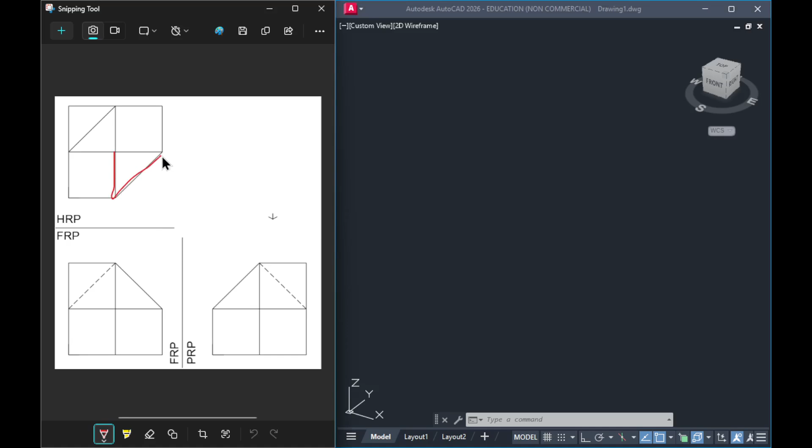Okay, let's just imagine the object first. What does it look like? This is a case wherein the FRP looks exactly the same as the PRP, which means there are symmetrical features. When we look at the image and try to imagine it, we can see that this plane actually appears in all three views.

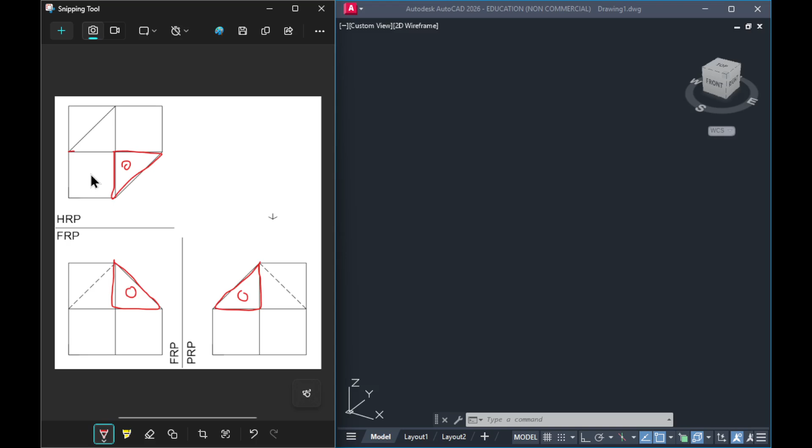So this is the same plane here, and it's also the same plane here. We can say this is our oblique plane. Then, looking at the right side and front views, you can also deduce that these two planes correspond to this plane and this plane.

So these two planes right here are inclined planes. Lastly, if you look at the backside plane here, it's actually symmetrical. This is another oblique, like a copy of the oblique on the other side. The only difference is that this area is hollow here, but on the other side there's a platform. This plane is just a normal plane, shown as an edge view here, and the same applies on the other side.

Hopefully that makes sense. I think that's the best or easiest imagination of this solid. There are probably other interpretations, but I think that's the easiest one we can come up with.

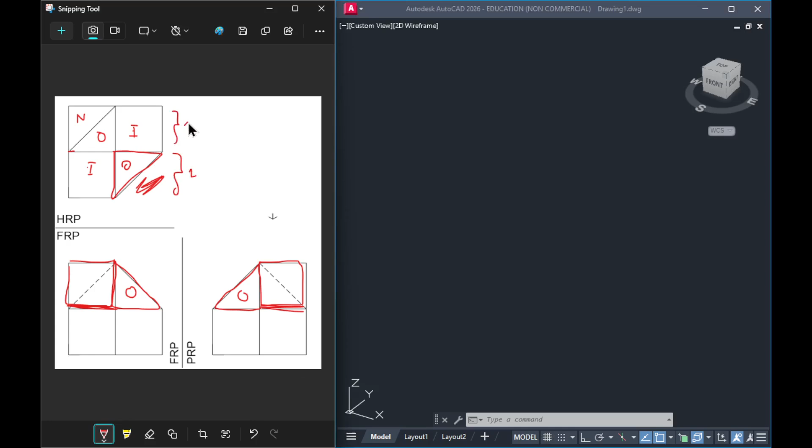So if you try to look at it, all points are just half distances, if you think about it. So what we can do is create the glass box as a 2 by 2 by 2 glass box. Think of it this way: this is one unit distance, and this is another unit distance, so 2 units in total. Same can be said for the width, 2 unit distance, and same for the height, 2 unit distance.

So let's start there. What we'll do is create a rectangle that is 2 by 2, like this. I always like to start with the model space slightly orbited, as opposed to just looking at it straight away from the top-down view.

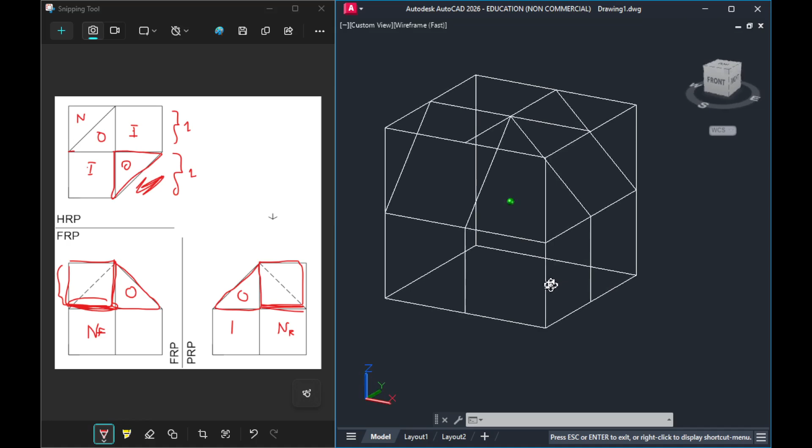Now, I'm looking at it. If I connect this line and this line, this point and this point, that will create the oblique. And if I connect this point and this point, that will create the incline. This one, this incline right here, that's an incline. This is the same incline, which is shown in this edge view here.

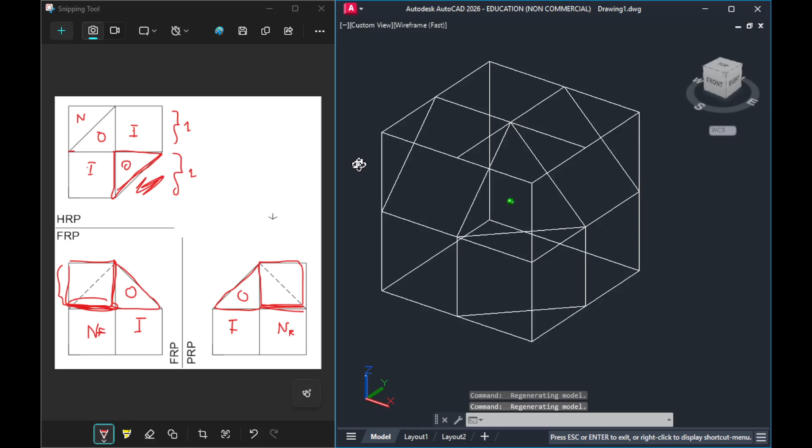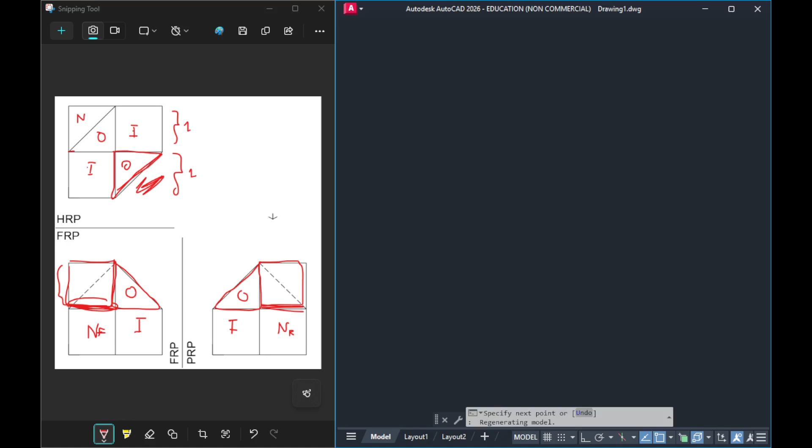So, gagawin natin is, bababa lang natin. But let's move it downwards by 1 unit, and connect it here. We'll do the same for this line. Move it vertical. Let's turn this on to make sure na vertical siya, and let's say 1 unit din. Then connect it here. Ganyan.

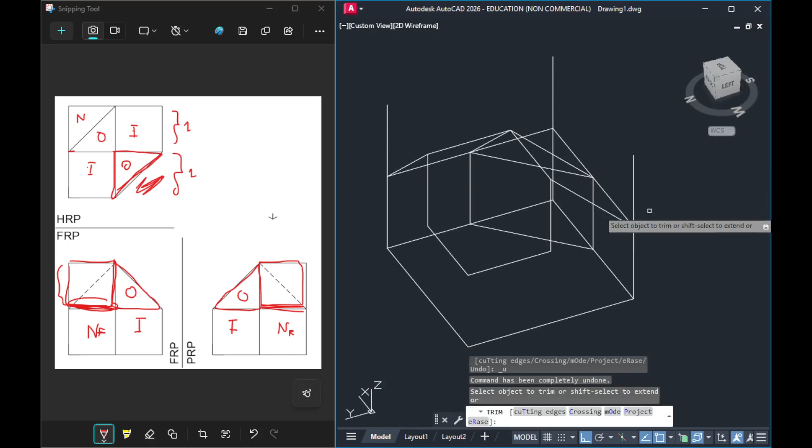Now, it may get a little bit confusing, so let me just delete these reference lines. Let's just delete this reference line right here. Trim muna natin, see if we can trim this as well. Instead of trimming, i-shorten ko lang siya. Can we trim this? Maybe, shorten lang din natin. And lastly, ito, trim ulit. No, shorten na lang. Punta dito. Actually, di-delete pala natin ito, no?

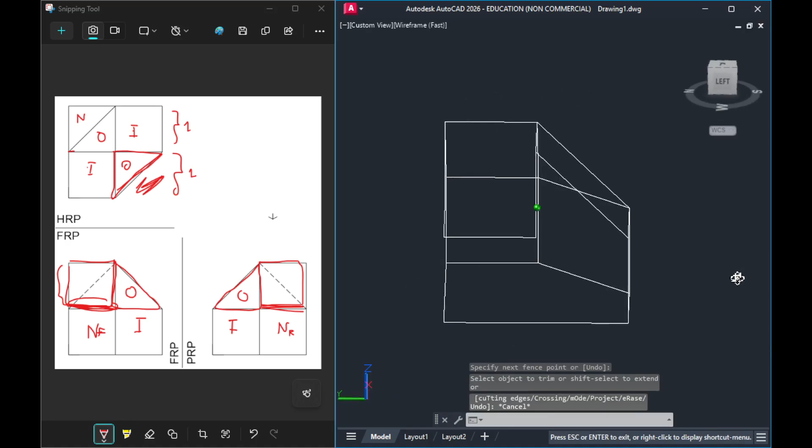We'll have to trim this pala. Trim. And also this one, trim natin. So pwede na ang gawin natin is, let's connect this line and this line, and we can probably turn ortho off.

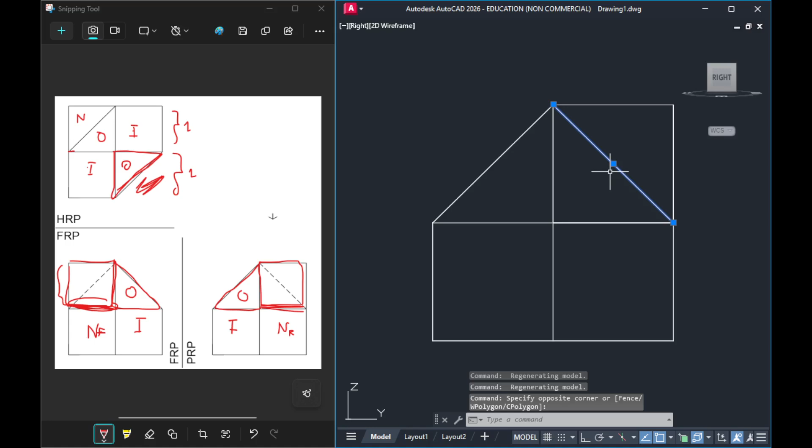And connect that one, so this will be our normal. If you look at the top view, tama yung view. If you look at the front view, it's this one. And itong line na to is a broken line kasi nasa likod yan. Again, it's still not being shown correctly because wireframe pa lang naman to. And sa right side view, ganoon din. Tama naman, except for this line, which is supposed to be a broken line. Okay, so ito siya.

And we need this line now to complete, so we have our wireframe. This is our wireframe. And from this wireframe, ang gagawin natin is we create surfaces now. So for the squares, gagawin natin easiest one to do, ito. The two easiest ways to create a surface is through either a region command or a loft command. The loft command is done by connecting two lines together, and it sweeps across that line, and whatever surface it produces creates a planar surface.

So gagawin natin is, and the other one is region. The region is if you have a closed loop or polyline, then if you do the region command, it automatically creates a surface using the profile of that closed polyline. So I think for the rectangles, or itong mga quadrangles na to, pwede natin createan siya ng closed polyline using REC.

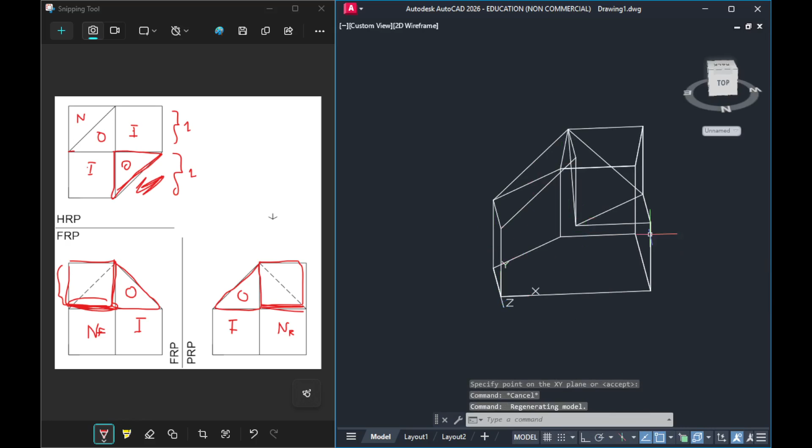UCS again, this is my origin. My X direction is here, Y direction is here, so ito na yung plane ko. So I'll do polyline again, ito, and C to close. Yan, this is now my polyline. Okay, so let me just change the visual style para mas ma-imagine nyo. I'll do shades of gray para mas makita siya.

Now I've created, saan yun, so this one, did I create a polyline for this? Hindi pala na-create yung rectangle dito, sige, mamaya i-create ko na lang. Pero let's start with this one, polyline. It's now polyline. So if I do a region command, REG for region, and select this polyline, press enter, so it creates a surface. So this is a region, this becomes a region, and the region is considered a surface.

What's next is let's also create another region using this one.

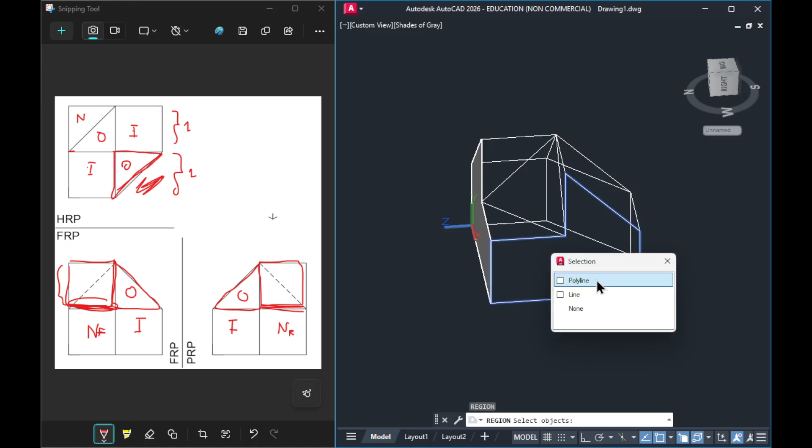Select the polyline. If these selection options don't appear, this is called selection cycling. You just press this button, or use the shortcut Control W to toggle it.

Do region, select, hover - selection cycling is quite important, especially when you have overlapping objects, like here where the polyline and lines overlap. So press space or enter, then you get this.

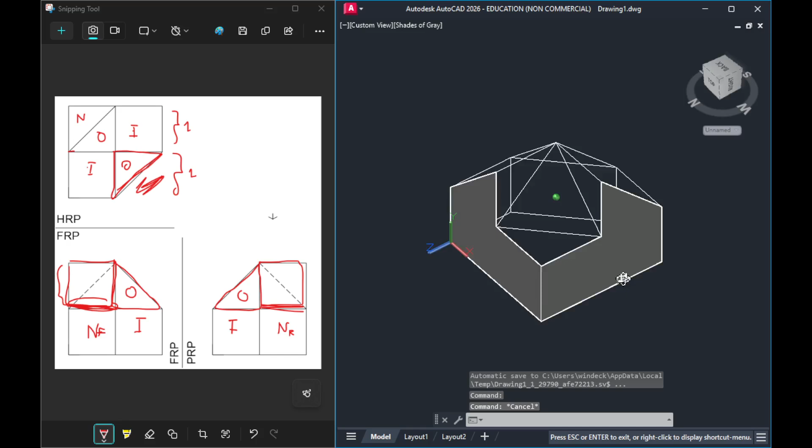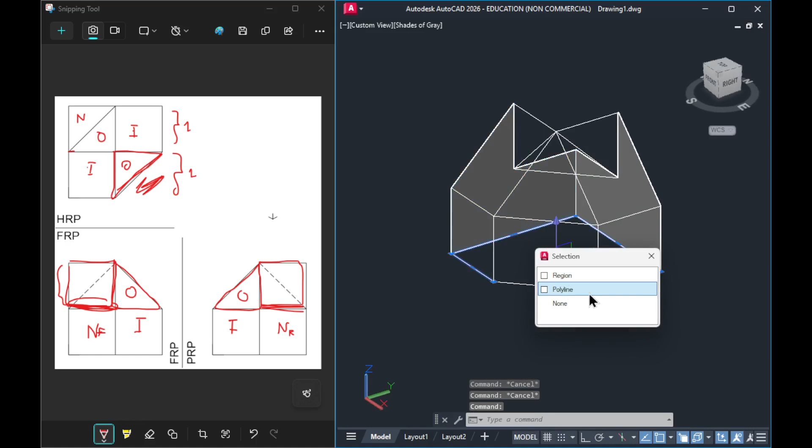Now I'll go back to world coordinate system. I'll do dynamic UCS because I think I didn't create the region earlier correctly - it created in world coordinate instead. That's why that polyline was wrong, let me just delete that polyline.

What we'll do is set up UCS again - this is my origin, X axis here, Y axis here, so I can create a region. Draw a rectangle here, or rather a polyline - this now becomes a polyline. So now I can create a region from the polyline, and it becomes a surface.

Again, let's do UCS once more - this is my center or origin, x-axis, y-axis. So now the vertical plane becomes my xy plane. Okay, let's do region again.

Select region, select the polyline. Wait, did I create it properly? Okay, region, and let's select the polyline. So it's slowly starting to take shape now.

For this one, I could do UCS again - X, then Y, then create a rectangle for the region. Or another way to do it, let me switch back to wireframe so you can see it in action - you can actually use the loft command.

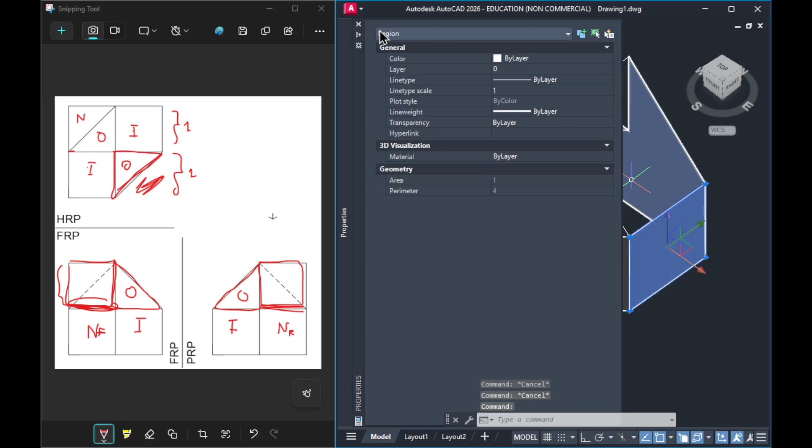But it has a different name. If you press Control 1 for properties, the type is a surface created through the loft command, whereas this other one is just called a region. Although they have different names, they behave the same - they're still considered surfaces. So when we eventually create a solid, they'll behave the same whether created through loft or region command.

So maybe I'll just use loft here. For triangles, loft is usually best because you can just select two sides of the triangle - this one and this one, or this one and this one. If there's a line here, it will still create the triangle.

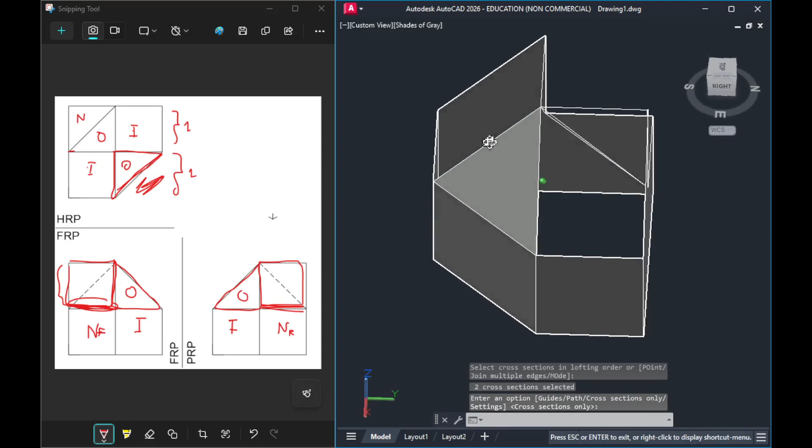Okay, let's do the simpler one - this one and this one. Press enter, cross sections only. Then let's do the command again - I can just press space to retrieve the same command.

So, line - is there a line here? Yes there's a line, so press enter. In a way, loft is faster since you already have the existing lines we created through the wireframe model, so you could actually use loft all the way.

Oh that was wrong. So, loft - this line and this line. Next I'll do loft from this line to this line. Let's repeat - loft from this line.

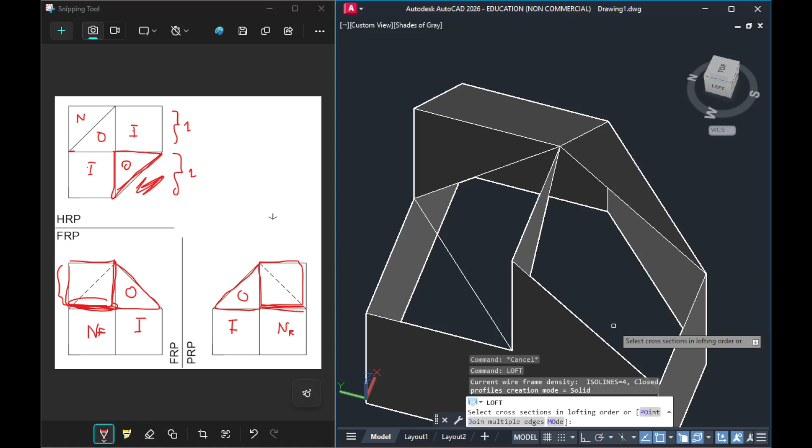That's why selection cycling is quite important here - once you create more and more objects, the objects start overlapping, so selection cycling becomes extremely helpful. So that's the line.

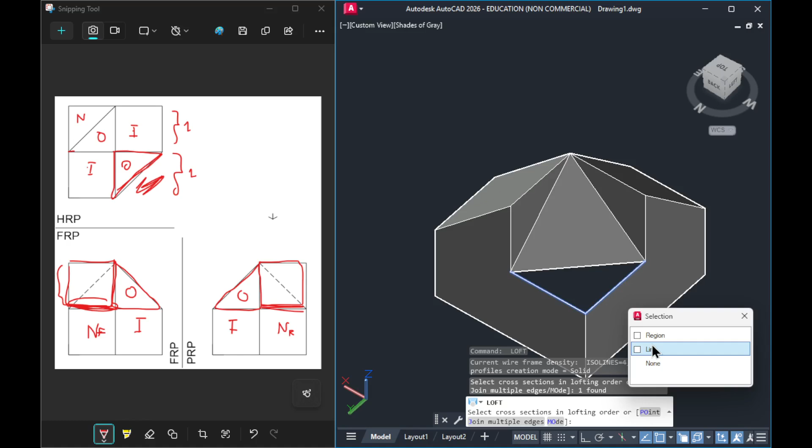Last is - what else? Just two more. This and this. And lastly, this line. Again, the line, at the center.

There's still one missing at the bottom. So we can create a polyline here - back to world coordinate. We can do a polyline from this point, close it, this one, and press C to close. That's our polyline. Let's select the polyline, and we can do a region of the polyline, and it will close it up.

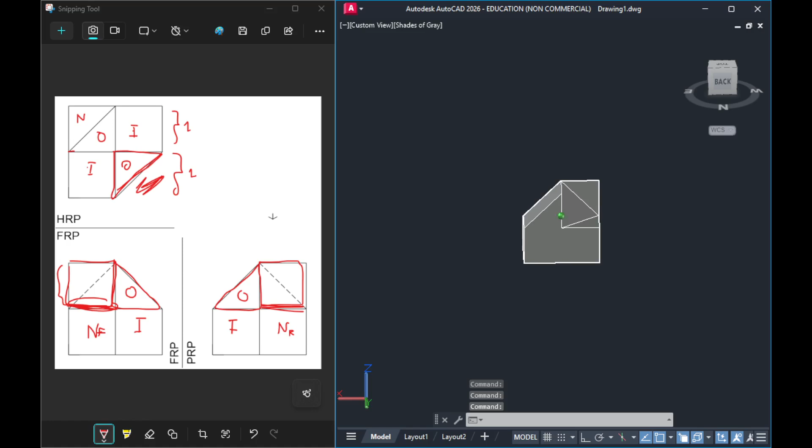If we did it correctly, this should be a watertight container - this bunch of surfaces now forms a watertight container. Because it's watertight, if we run the command surfsculpt, then select all the surfaces and press enter, it becomes one single solid.

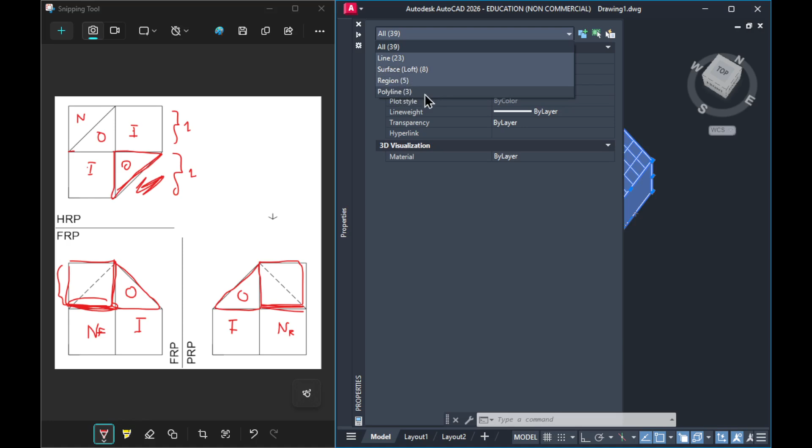If I press Control 1 for properties, you can see it's now a solid, as opposed to before being a bunch of surfaces. Let me undo that - Control Z so it's surfaces again. If I select everything, Control 1 shows there are 23 lines, 8 surfaces through the loft command, 5 regions, and three polylines. Now if I run the command again, the command is surfsculpt.

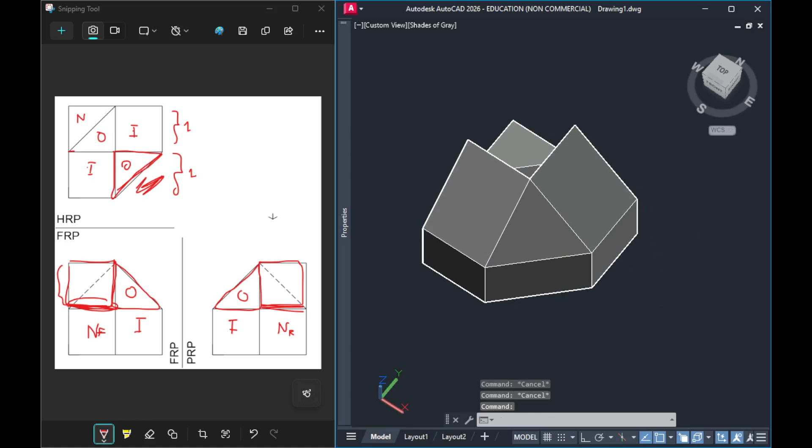Select everything, press enter. Now this becomes a single solid. So now that we have this solid, I'll teach you how to create an auxiliary view. Again, our goal is to show the true size of this oblique plane.

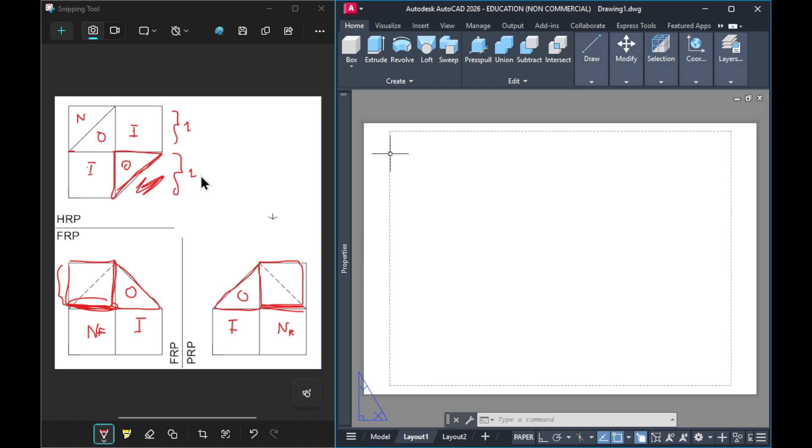So let's go to the layout tab. Just delete this first. I'm assuming everyone already has the Inventor interoperability plugin installed.

Let's go to layout and create a base view. It will load a bit, no? If this is the first time you're using the view base command, your AutoCAD might lag a little. Just wait it out, then here's the preview of the object.

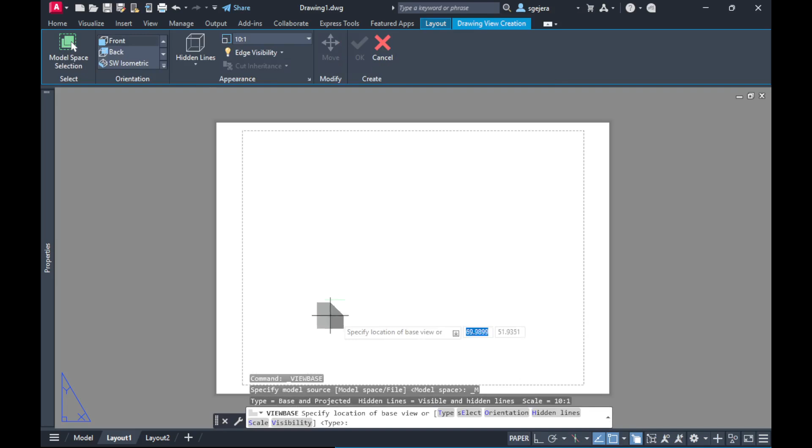10:1 is too small for my liking. Let me make it bigger. I can do 30:1, this looks okay. But actually, maybe I'll use 20 instead since I'll be rotating this in space for the auxiliary view.

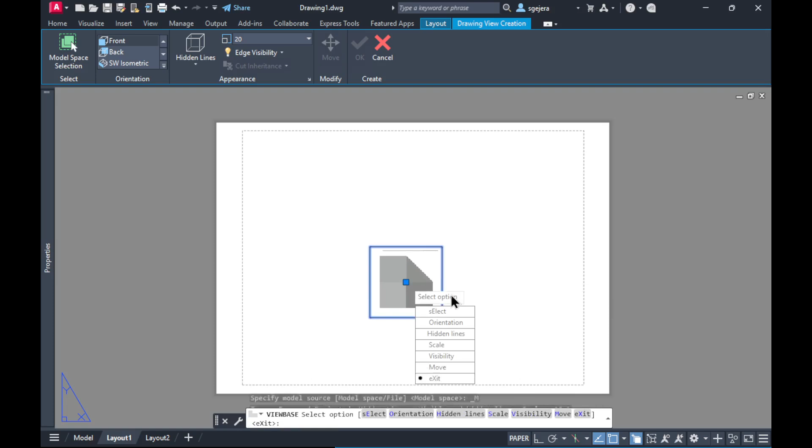Let's do this first. I'll just place it in the middle. That's my parent view, the front view. And before I do that, sorry, we should change this to third angle.

Always, before you do anything, especially when involving the view base command, always convert to third angle projection first, because third angle projection is the projection we use in ES1. Okay, so again, view base.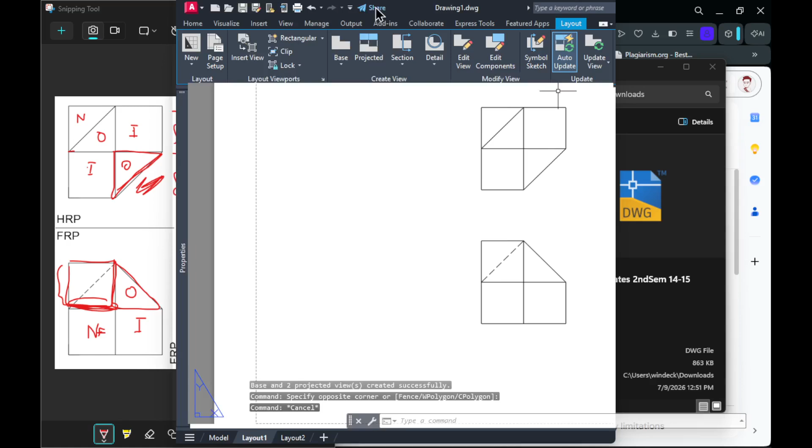This is our multi-view projection, so let's double check. That's correct, right? Let me delete all the markings here. Let's control-C. This should be deleted. So if you look at the original, this is one way you can check if what you did is correct.

Is to just compare the given with the 3D model you created and check the view base. If they're the same, it means the model you created is correct, or at least it's one of the possible solutions for that particular multi-view projection.

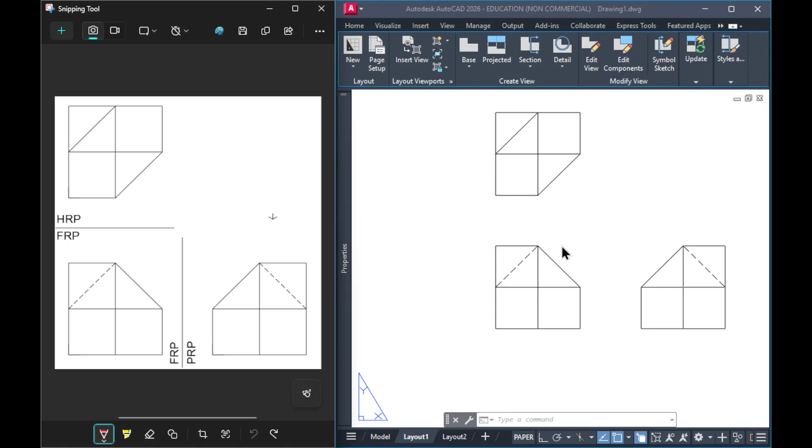Okay, so here it is. Now what we'll do is find the oblique plane. Now, what I showed you in the video before, let me make this more compact.

What I showed in the video I sent you uses a deprecated command, a combination of SOLVIEW and SOLDRAW, which isn't really used much in AutoCAD anymore. The only time you should be using SOLVIEW and SOLDRAW is if you have a MacBook, because MacBooks don't have the inventor plugin, so they can't use view base. So the only workaround is to use the deprecated feature, SOLVIEW and SOLDRAW.

But if you're using a device that already has view base, we can actually use a workaround instead. So again, if you look at create views, even the projected ones here, this only creates what are basically orthographic views.

So either if you move to the left or right, that will create perpendicular reference planes, which are the primary reference planes. It can be front, right, top, bottom, and left side, and you can also create the back side.

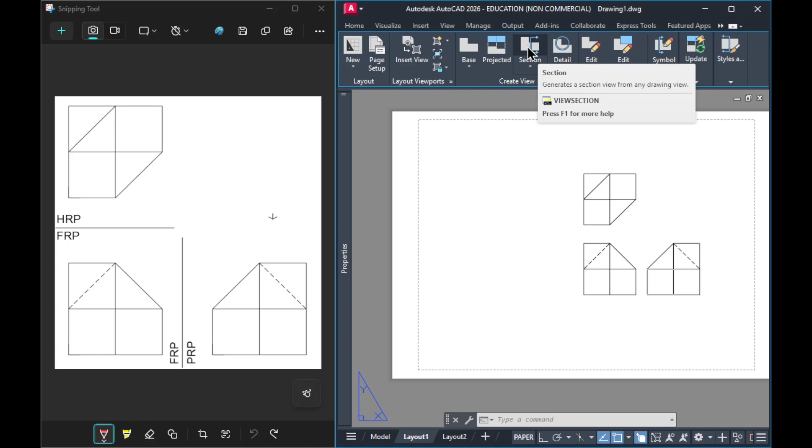But let's just do a random section view here. Let's move it here. Ang mangyayari is it shows a sectional view of the object as the view cuts across it. Now see what happens if I move the section view such that it doesn't cut the object anymore—the hatch lines disappear, because this view, or this sectioning plane, does not cut the object.

So we can use this section view right now as a sort of our auxiliary reference plane. If we try to angle this—not sure if we can angle this—if we angle it, it actually angles the view as well. So that's its auxiliary rotation. We'll use that to our advantage. It's like the sectional view becomes a pseudo auxiliary view in that manner.

So how do we get the ARP1 and ARP2 for this particular case? The way it works is, when we do an auxiliary view, if we want the true size, we first need to edge-view the plane.

Now the plane in question is this one. We can start at any view, but if we want to start from the front view, let's say this is our starting point. Then we need to point-view one true length line here. What is a true length here? If you look at this one, it's this line right here. This particular line is the true length line because it's parallel to this reference plane, or this line is parallel to this one, which makes it a true length.

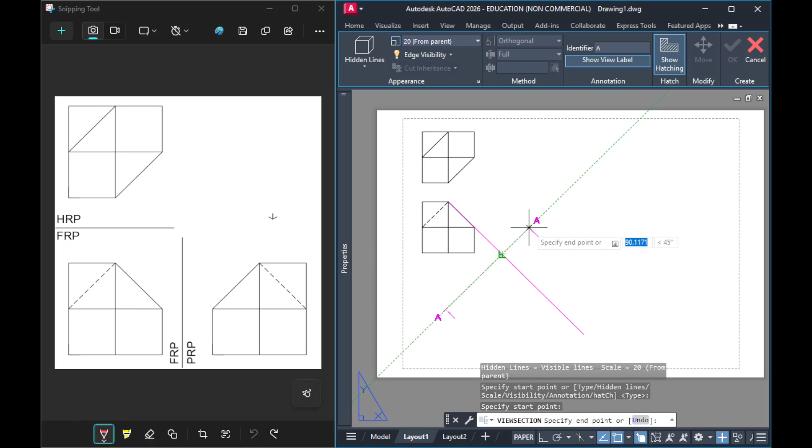So it's basically just creating an auxiliary reference plane, and I'll move it downwards. Center. And now, this is my first auxiliary view.

What I can do is I can even create a line here, and now I can delete this one, since we're just deleting the markings. And let's add a text. This is FRP, no? FRP sa taas, ARP1 sa baba.

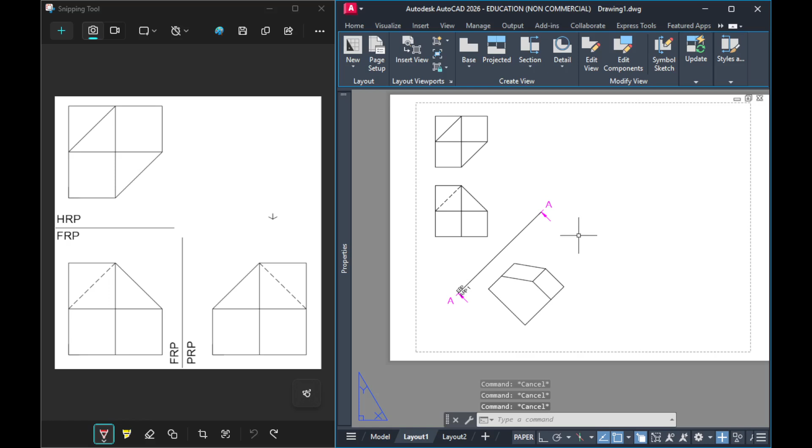We can even do something like this, no? And if you want, we can delete. Pwede pa natin i-delete tong identifier. Sige, wag muna natin i-ano na, mamaya natin problemahin yan. Pero, this is now ARP1.

Okay, so now that we have ARP1, I should probably move this somewhere dito. And the good thing about moving this one, it follows the rules for projection, no? You can't accidentally move it in other directions. So ang pwede lang natin ma-project siya is along perpendicular to the projection lines, which is this one.

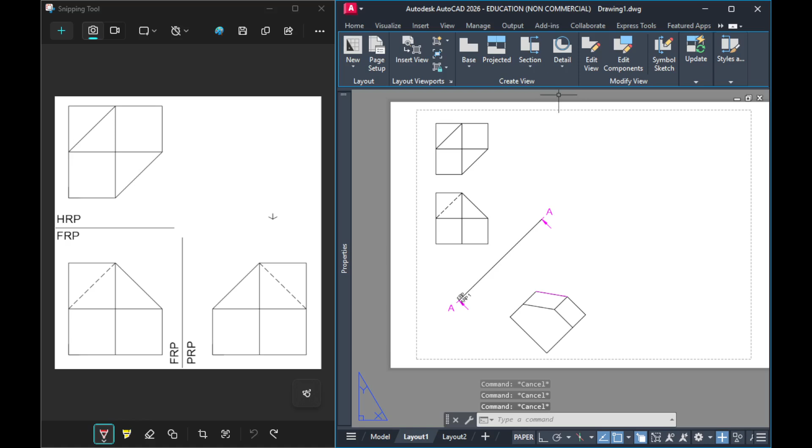So move lang natin siya konti dito kasi we have to create a parallel reference plane. Okay, so again same as before, gawa lang muna tayo ng isang reference plane. And again, ang purpose lang nitong reference plane na to ay para may basis tayo sa paggawa ng ating sectional view. Kasi hindi kasi considered as 2D lines itong lines na created by the view base, kaya hindi gumagana yung object snapping. Okay, so let's create a section view again from this parent view.

Let's gawa tayo naman somewhere dito, siguro make it parallel to this line. Like so. Oh sorry, bakit ko kinancel? I'll do it again. From this section, create a parallel line, like so, and I'll just project it somewhere dito. And I'll just delete this. Medyo malayo to, or okay na siguro. So I'll just make this a little shorter now.

So eto siya, this is now my auxiliary reference view. Tapos, sorry, nagalaw ko yata yung ano. Tama naman. And let's just mark the ano din, let's change this. I'll just mark point B to point B, and let's just...

Also add a text. Let's call this ARP2 naman, ARP1 sa baba. You can always make it a little bit nicer if you really want to. Dalawa lang natin ito, and notice how if you change it, nagbabago din yung sectional view.

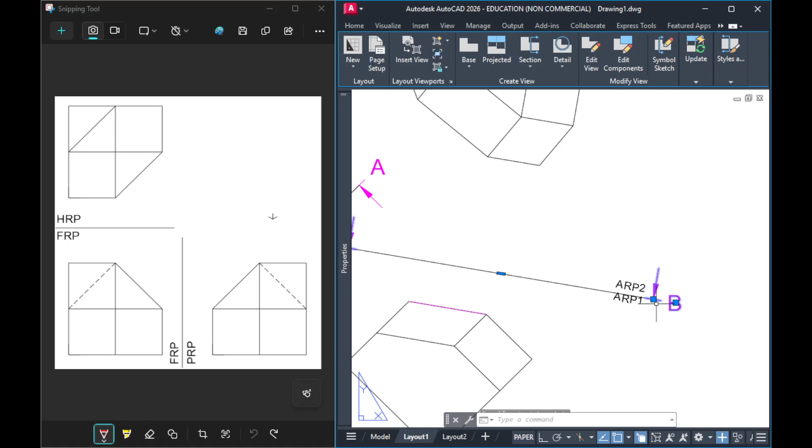Okay, and essentially we have created the ARP2, which shows our plane in its true size. Okay, let's just mark it true size.

Like so. Okay, and because ARPs or auxiliary reference planes are considered as parang additional views, then dapat we should—let me just remove this reference line na ginawa natin—because they are considered as reference planes, then dapat litaw pa rin yung hidden lines, no?

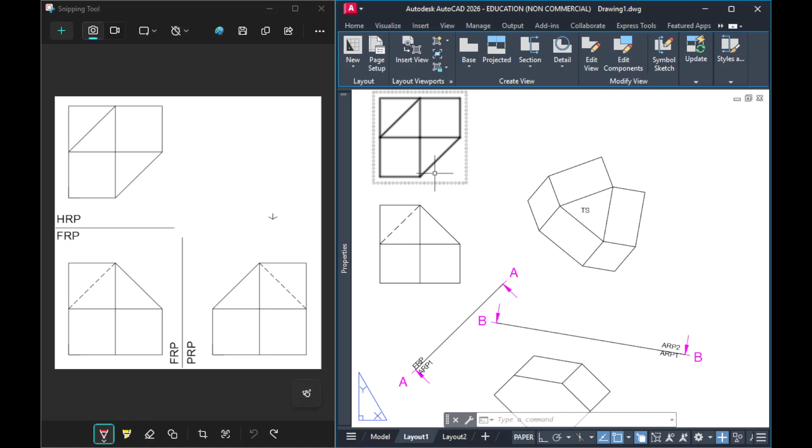So let's just double click this one, click on hidden lines, and instead of just visible lines, we also show the hidden lines. So visible and hidden yung pipiliin natin. Okay, so press X, escape to exit para kita yung visible lines.

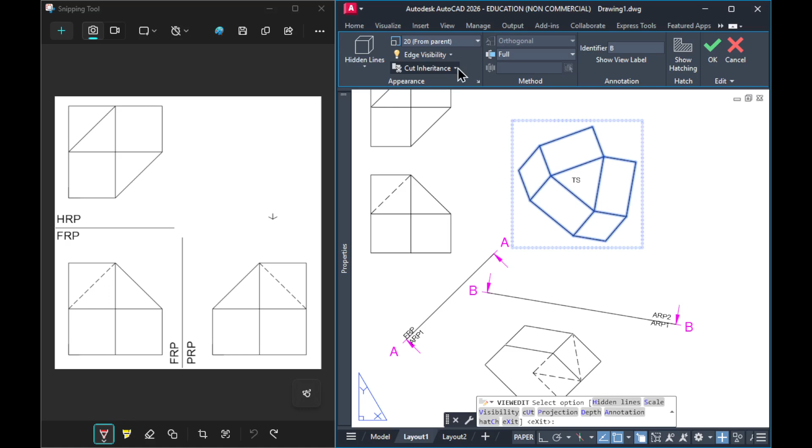This one as well, double click. Pwede naman double click, or you can also use edit view here. Then from edit view, not edge visibility, hidden lines here. Pwedeng i-change nyo from visible lines to visible and hidden lines. Press enter, and now you can see the final answer.

So that's how you use sectional views. And let me close the ribbon para mas malinaw, and let's make it bigger, no?

So you can see na using yung sectional views, we sort of quote-unquote cheated our way into creating auxiliary views. Kasi sectional views aren't supposed to be used to create auxiliary views, pero we used it to our advantage, and we have created—sorry, we have created an auxiliary view from the sectional view function.

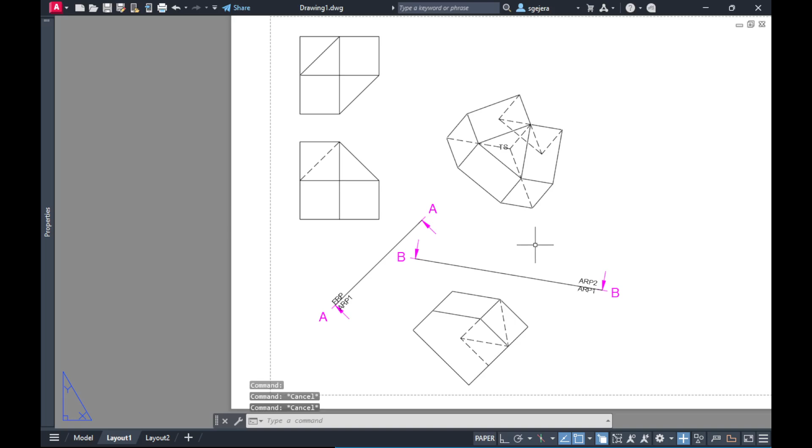So hopefully that helps. This is a lot easier, if you really think about it, than the SOLVIEW and SOLDRAW method. Yung SOLVIEW and SOLDRAW method, you're using this one—ito, SOLVIEW, SOLDRAW. And the messy part about the SOLVIEW and SOLDRAW method is that if you look at the layers, sobrang daming layers na nagkacreate ng SOLVIEW and SOLDRAW depending on the different name views na gagawin nyo. At least dito, konti lang yung nakikreate. So imagine kung SOLVIEW SOLDRAW, ito, multiplied mo by the number of name views. Okay, it gets a little messy really fast, no?